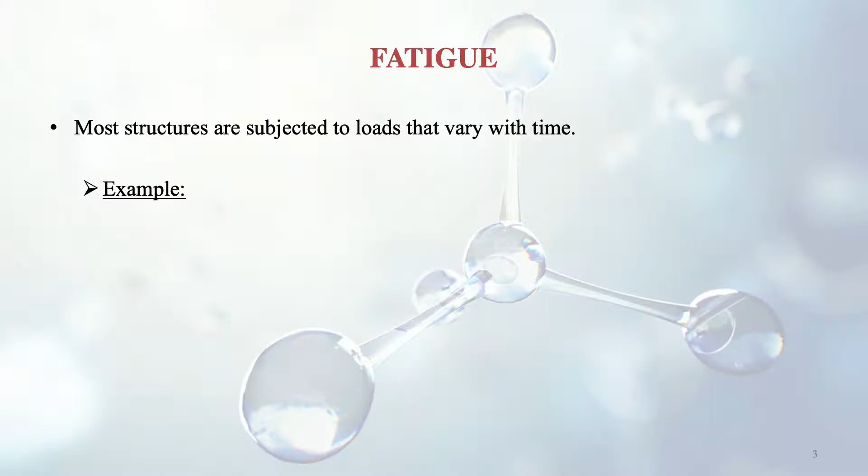Most structures are subjected to loads that vary with time, so it's a dynamic kind of thing. Dynamic means the time factor comes in. Examples include aerodynamic loads, wind loading on buildings, and the earth's resistance to earth-moving machines. All these are dynamic loads which keep changing with time.

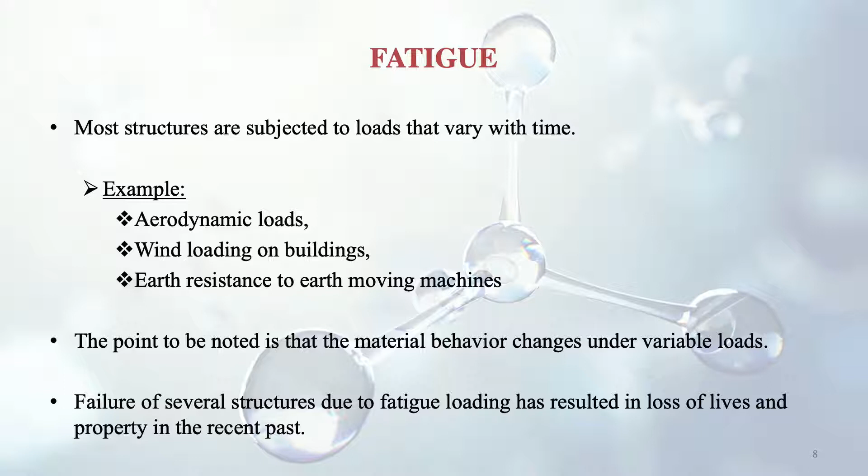The point to be noted is that material behavior changes under variable loads. Different properties of materials and their behavior change under loads varying with time. Failure of several structures due to fatigue loading has resulted in loss of lives and property in the recent past, such as bridge failures or space shuttle failures, where materials used may be failing over time without our knowledge.

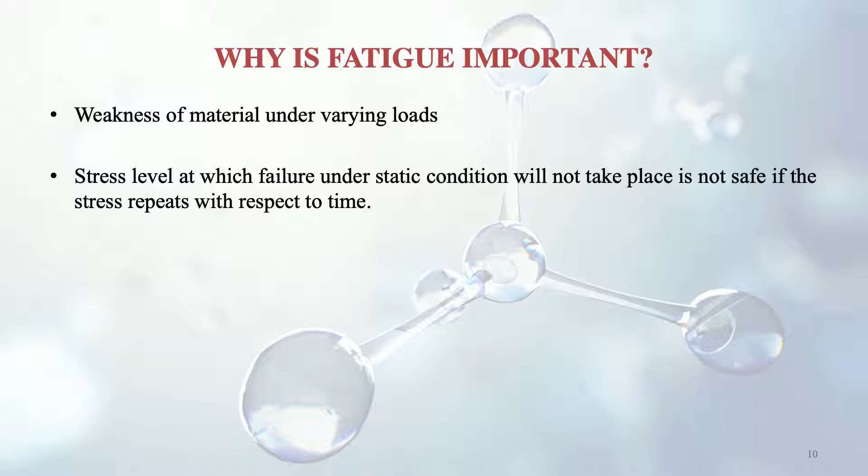Why is fatigue so important? Because the weakness of the material keeps increasing under varying loads. A stress level at which failure under static condition will not take place is not safe if the stress repeats with respect to time. So failure under static condition occurs at a higher stress level, but if the load is varying, it occurs at a lower stress level. Theoretically, there is no stress level for most materials which will be indefinitely safe - there is no level where we can say no failure will take place beyond or below it.

However, practically, some safe stress level can be defined and determined for a specified number of cycles. In practical terms, we define a certain stress level below which we say it will be safe even if you increase the number of cycles.

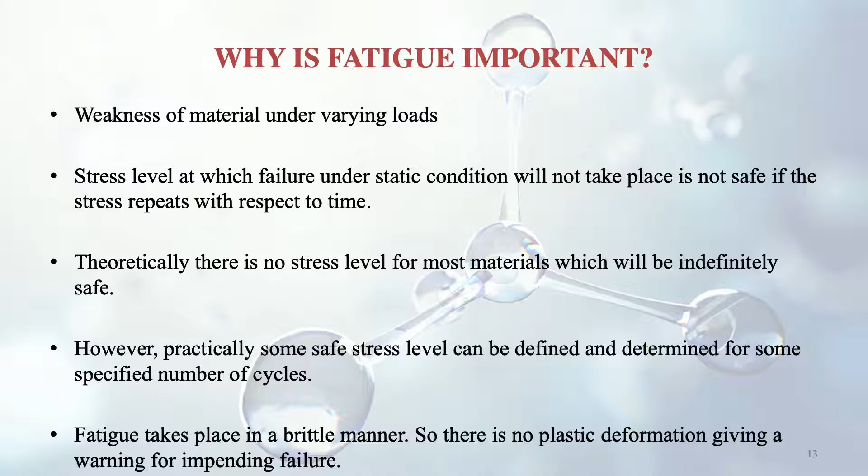Fatigue takes place in a brittle manner, so there is no plastic deformation giving a warning for impending failure. This is a very important thing to know - fatigue will take place in a brittle manner. So brittle fracture, we know, just happens - there is no warning. In case of ductile material, we have seen earlier that necking and other things take place, but in brittle fracture nothing like that happens. So it is instantaneous, we can say.

One example of this is an airline in the 1980s, the Aloha Airlines flight, where the upper portion of the fuselage broke apart. This was also a kind of fatigue failure.

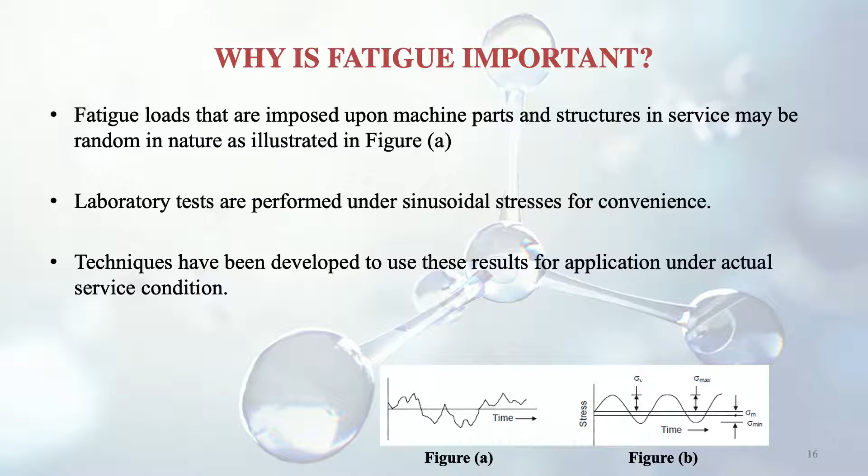Techniques have been developed to use these results for application under actual service conditions. The sinusoidal stress variation is shown in the figures as mentioned before. This stress cycle is also termed fluctuating - like a bulb, if the voltage in your house fluctuates, the bulb light also fluctuates. So this is what fluctuation means, and the stress also fluctuates like that.

About 90% of data are collected under fully reversed stress cycle, meaning suppose the stress is on the positive side at some point, then it will be towards the negative with equal magnitude as the cycle moves forward. This is what is meant by reversal of stress - one time it is completely positive and the other time completely negative with the same magnitude, in the opposite direction.

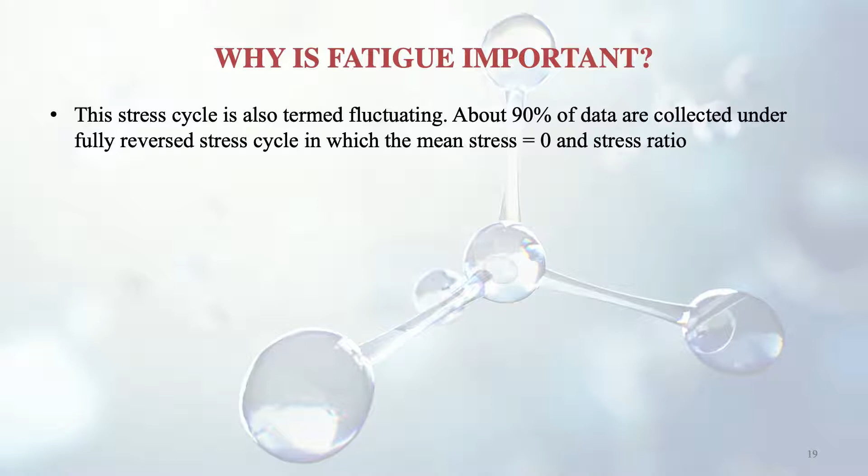So, fully reversed stress cycle in which the mean stress is 0, and the stress ratio is given by R, that is sigma minimum upon sigma maximum. Sigma minimum is the minimum stress and sigma maximum is the maximum stress, and the mean stress is sigma max plus sigma min divided by 2, and the variable stress component is given by sigma max minus sigma min divided by 2.

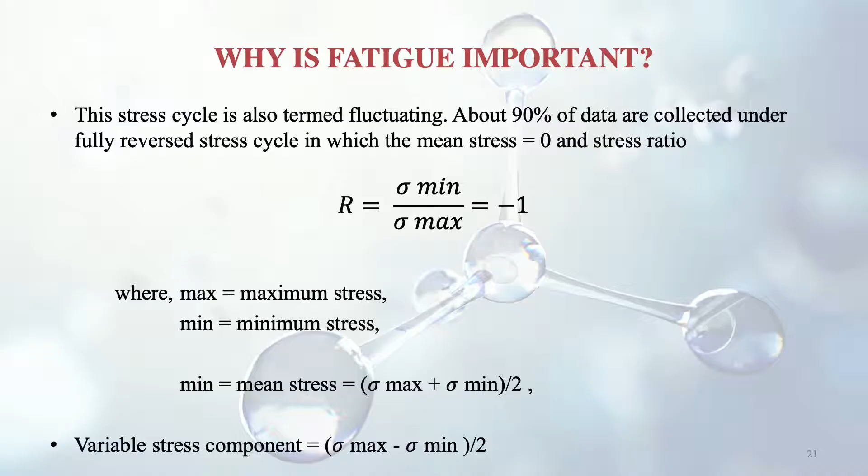Now we discuss the test procedure for fatigue. The applied stress can be of different types: axial, bending, torsion, or their combination, like all these loads we have discussed in our earlier sessions. So in each case a particular type of machine is required. When you have different types of loads, different types of machines are used.

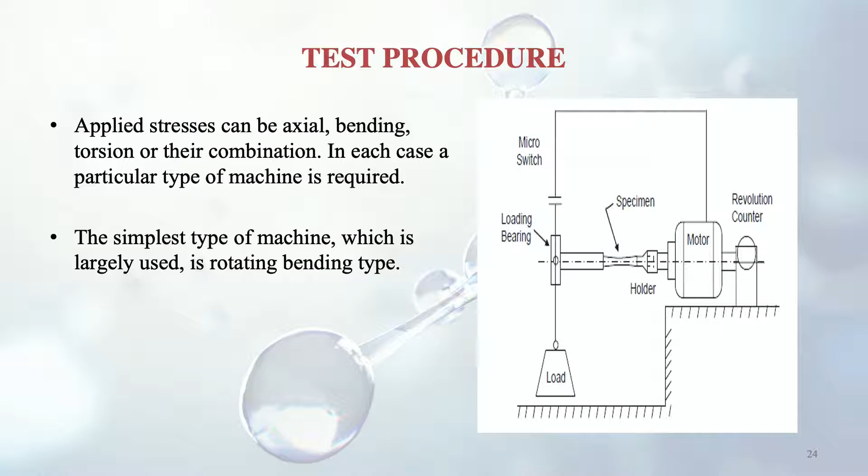The simplest type of machine which is largely used is the rotating bending type, shown in the figure. In this machine, a dead weight is applied upon the specimen through a bearing while the specimen rotates. Generally the specimen is loaded as a cantilever or under 4-point bending. As given in the figure, it's like a cantilever.

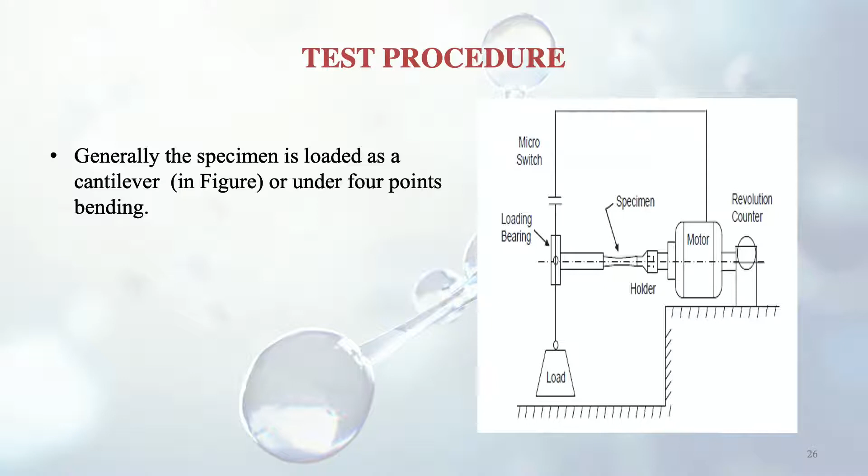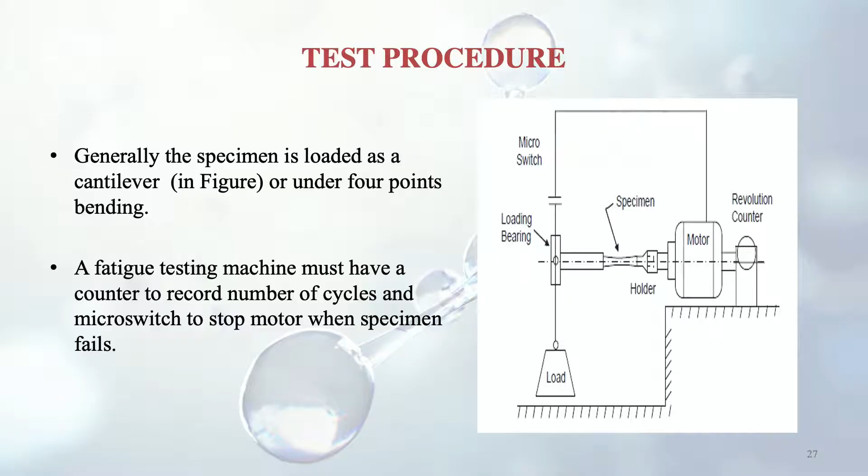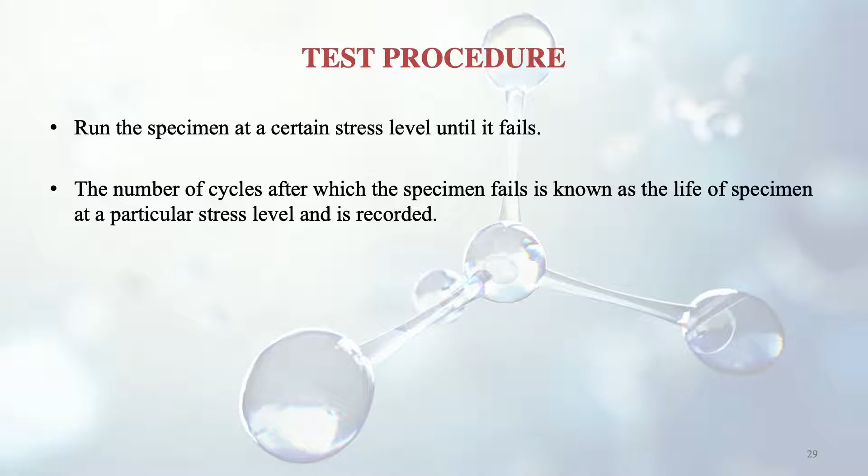A fatigue testing machine must have a counter to record the number of cycles and a micro switch to stop the motor when a specimen fails. So what we need to do is run the specimen at a certain stress level until it fails. The number of cycles after which the specimen fails is known as the life of the specimen at that particular stress level and is recorded. Thus, a number of observations for stress levels and corresponding number of cycles to failure are obtained.

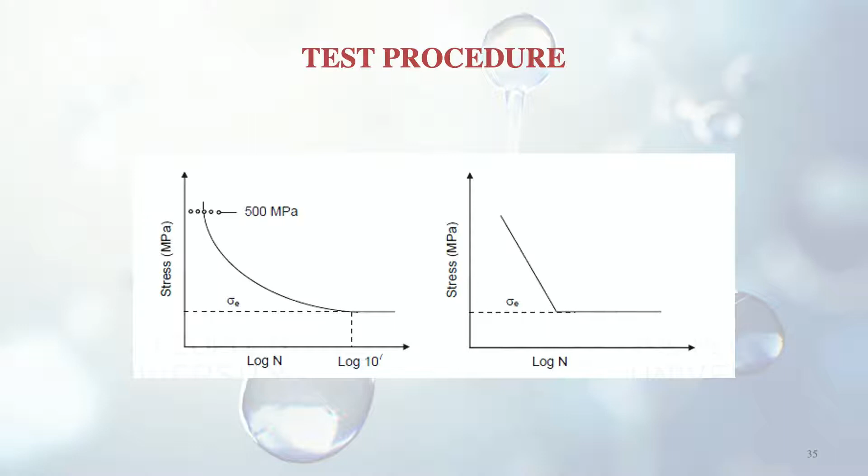Generally, several specimens at each stress level are tested. For obtaining fatigue curves, the stress levels are plotted as ordinates and logarithms of the number of cycles are plotted as abscissa. So this is a curve where stress is on the y-axis and logarithm of the number of cycles is on the x-axis.

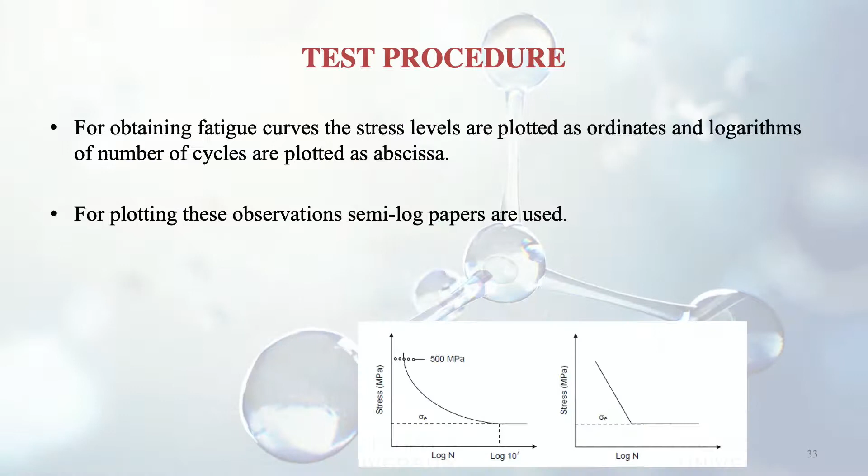Why are we taking logarithmic? Because it gives a certain number. Suppose it is 10 to the power 4 cycles; when we take log of that to the base 10, it gives us the number 4. So we can represent it on the scale in a convenient manner, like 1, 2, 3, 4, 5, 6, 7 and so on. For plotting these observations, semi-log papers are used because one axis is log based and the other one is simple.

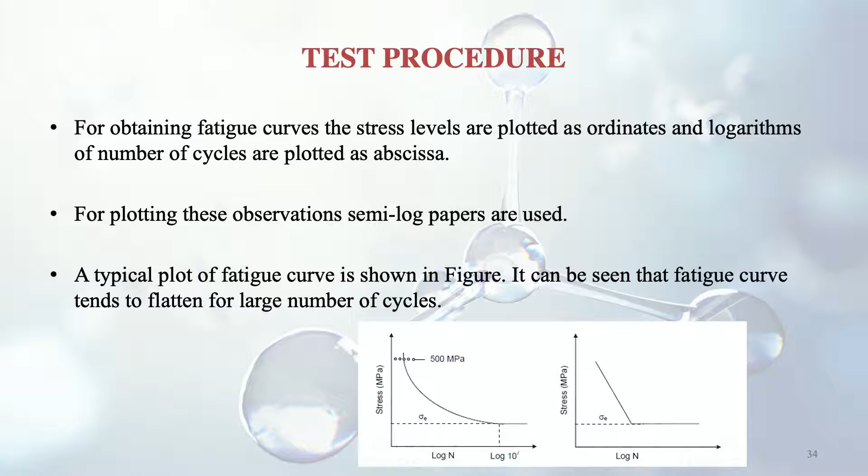A typical plot of the fatigue curve is shown in the figure. It can be seen that the fatigue curve tends to flatten for a large number of cycles, meaning that it becomes parallel to the x-axis after a large number of cycles.

The highest stress level is so chosen that the number of cycles to failure is around 10 to the power of 4. The fatigue curve is seldom investigated for cycles less than this, because if we are looking at fatigue, we need a number of cycles. We cannot say we've done it for 10 or 15 or 20 cycles; no, we need a larger number. So that minimum is around 10 to the power of 4.

Further, the fatigue tests are rarely continued beyond 10 to the power of 8 cycles, because such long endurances are not common in service and the time required for them will be very long. So if we want to go to 10 to the power of 8 cycles, it will take a very long time, and this fatigue testing will require a very long time and will not be practical for us. Also, the material becomes more endurant after a certain number of cycles, so we don't need to go to such a large number of cycles as 10 to the power of 8.

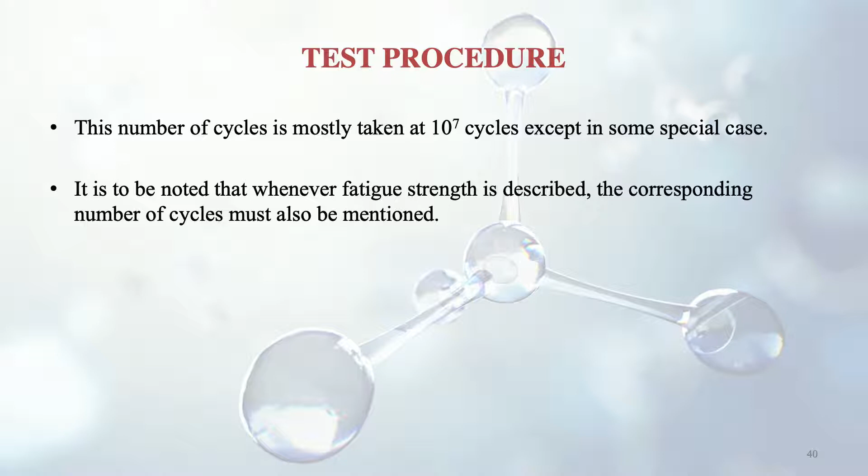The fatigue strength of material is defined as the maximum alternating stress which a material will withstand for a given number of cycles. So this is the fatigue strength of the material: the maximum alternating stress which a material can withstand for a given number of cycles. This number of cycles is mostly taken at 10 to the power 6 to 10 to the power 7 cycles, except in some special cases. It is to be noted that whenever fatigue strength is described, the corresponding number of cycles must also be mentioned, so fatigue without mentioning the number of cycles has no meaning because it's dependent on the dynamic type of loading.

There are some materials for which failure does not occur once the specimen has endured nearly 10 to the power of 6 cycles.

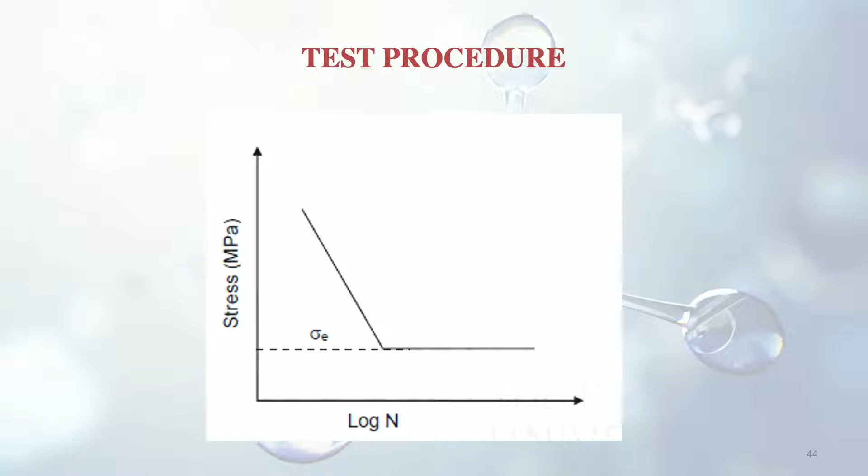It is a standard that if a specimen has already endured 10 to the power of 6 cycles without failure, we take it that this material is not going to fail. So this S-log-N curve comprises two straight lines: one in a finite region, an inclined line, and the other a horizontal line representing non-failure. This is for mild steel. It is always a straight line in case of mild steel, whereas it was curved for other materials. The stress at which the curve becomes horizontal is known as the fatigue limit or endurance limit.

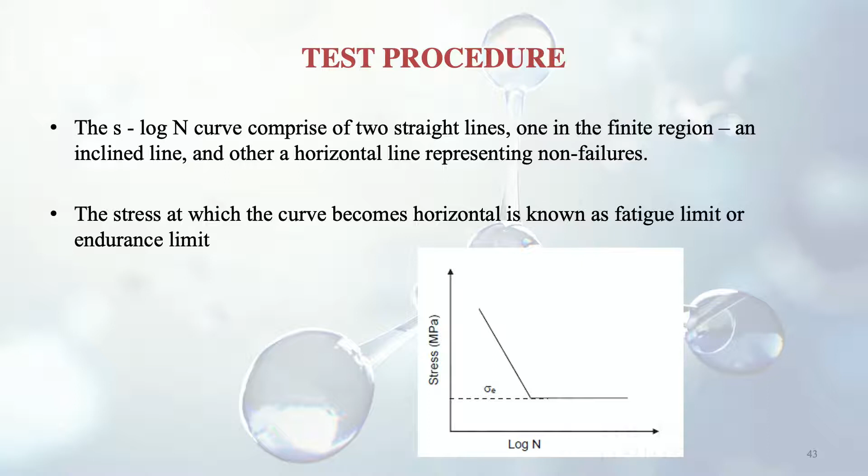Now we will discuss the mechanism of fatigue. How does this fatigue happen? Final failure in fatigue is due to extension of a crack to a critical value at which the uncracked portion is so small that the specimen cannot sustain the stress and hence fractures.

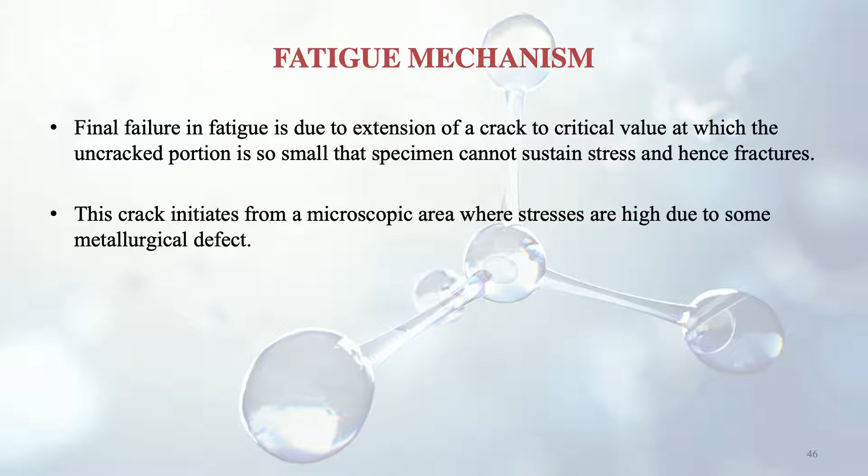Suppose I have a small hole of say 1 millimeter diameter, and due to fatigue it becomes larger - 2 millimeter, 6 millimeter, 8 millimeter - and it grows again and again. Finally it will reach a point where the uncracked material is very small, so it will rupture. This is the mechanism in fatigue: a small crack goes on increasing in dimension and becomes bigger as dynamic load is applied on it. This crack initiates from a microscopic area where stresses are high due to some metallurgical defect. Stresses can be high in that region even if the crack is small, due to the metallurgical defect.

There are various kinds of metallurgical defects, which is why manufacturing defects and metallurgical defects are important. Due to high stress at any point in a crystalline material, localized yielding takes place, resulting in slip in the direction of maximum shearing stress. Shearing stress also causes this crack to grow. As the stress cycling continues, the slip causes very minute cracks to generate, and they keep growing slowly and progressively with increasing number of cycles, as I explained earlier.

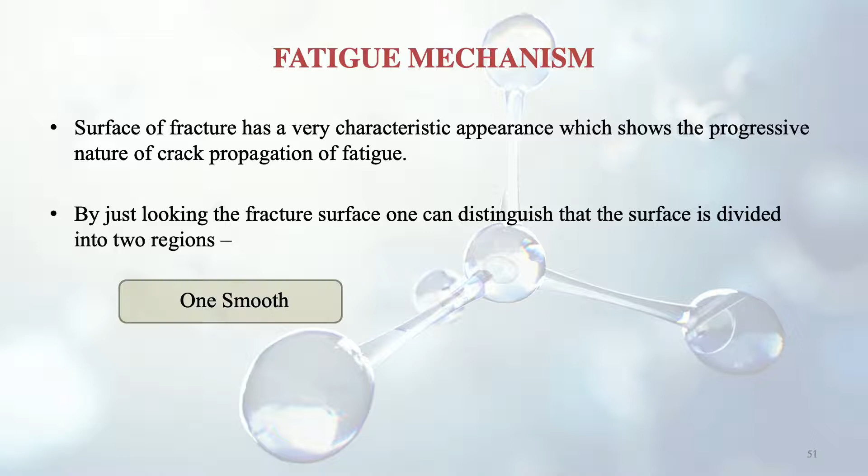The surface of fracture has a very characteristic appearance showing the progressive nature of crack propagation in fatigue. It's mostly on the surface that fatigue starts. By just looking at the fracture surface, one can distinguish that it is divided into two regions: one smooth and the other rough and jagged. If you take a specimen that was under fatigue, you can make out from the surface that one region is very smooth, the other is rough and jagged.

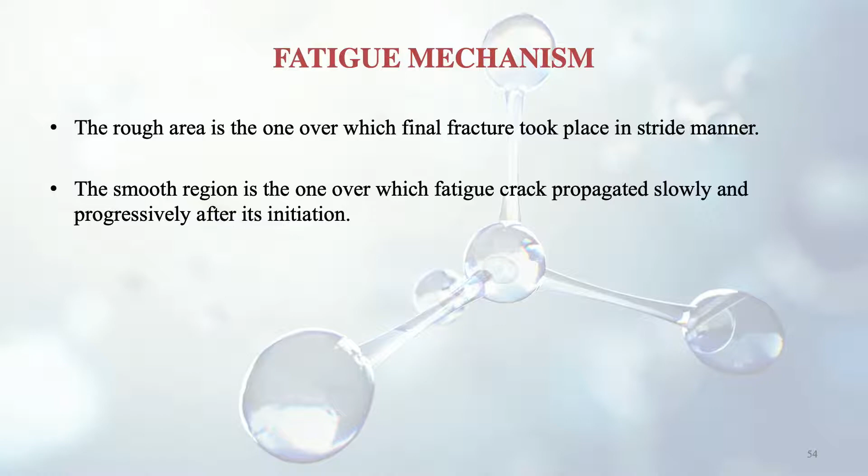The rough area is where final fracture took place in a sudden manner. The smooth region is where the fatigue crack propagated slowly and progressively after its initiation. The rough area is where fracture takes place, and the smooth one is where it propagates slowly. The two crack faces remain in contact, constantly rubbing against each other, which causes a smooth surface to come up.

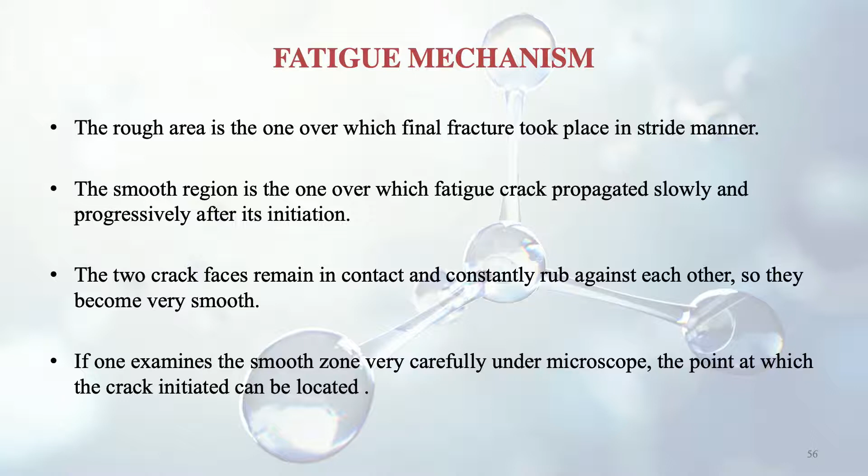If one examines the smooth zone carefully under a microscope, the point at which the crack initiated can be located. From the smooth zone, under a microscope, we can find the point from which the crack initiated. Marks like beach markings, in the form of conchoidal rings, spread out from that point - somewhat like concentric circles. These beach markings represent the sites where the crack stopped momentarily.

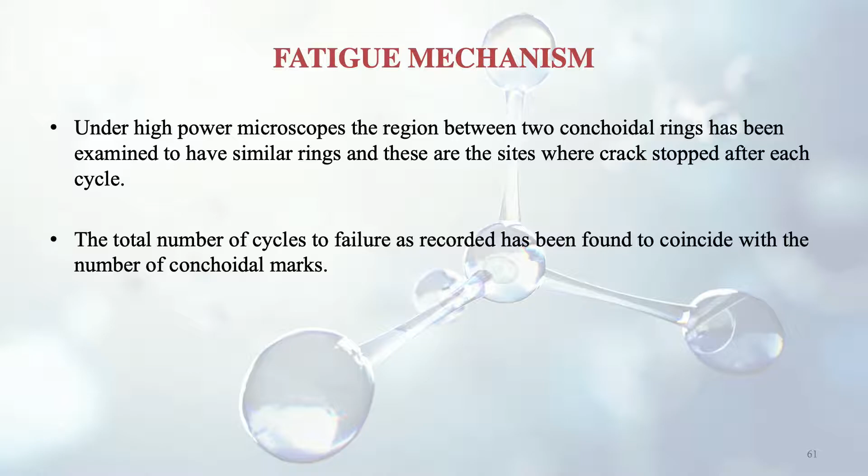In many cases, this nature of fatigue fracture surface can be seen by visual examination. Under high power microscopes, the region between two conchoidal rings has been examined to have similar rings, and these are the sites where the crack stopped after each cycle. We study this with high power microscopes because only then can we differentiate between two conchoidal rings. The total number of cycles to failure recorded has been found to coincide with the number of conchoidal marks, so these marks give us the total number of cycles.

The study of these conchoidal marks is very important. That's why you use the high power microscope to know about the number of cycles, because they are exactly similar to the number of cycles of loading.

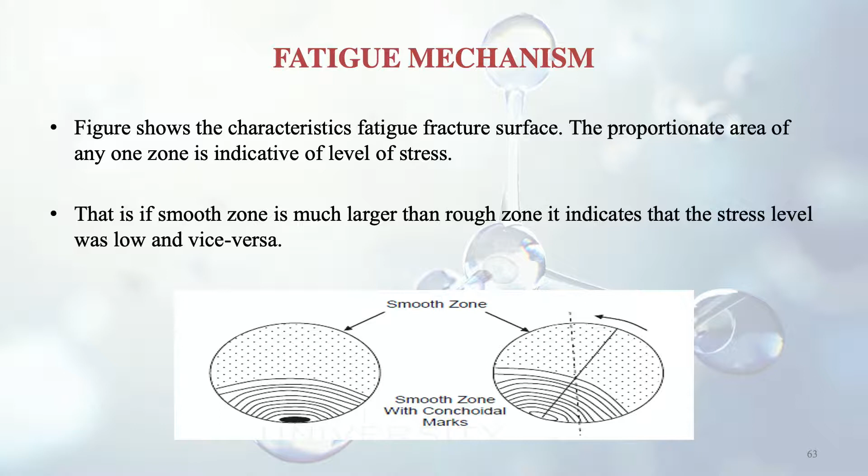If there are several points of crack initiation, it indicates that some geometrical stress concentration on the surface was present. So if there are several points of cracks, or a number of small cracks, it means that the specimen was subjected at that place to a very high stress concentration.

In rotating bending, the conchoidal rings tend to turn and center on a different diameter. So if it is on a certain axis, it turns and takes up a different diameter. It is shown in the figure, the tendency of the crack to propagate in a direction opposite to that of the rotation.

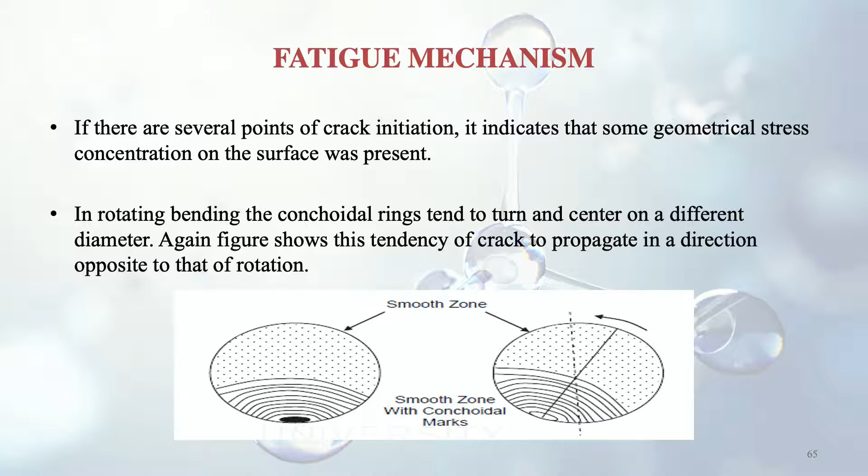Now we discuss the statistical nature of fatigue. The basic nature of the fatigue mechanism suggests that one can expect a large variation in data. The initiation of a crack at a point in the material depends upon a suitable combination of highest stress concentration due to local defect and level of stress, along with a larger number of cycles.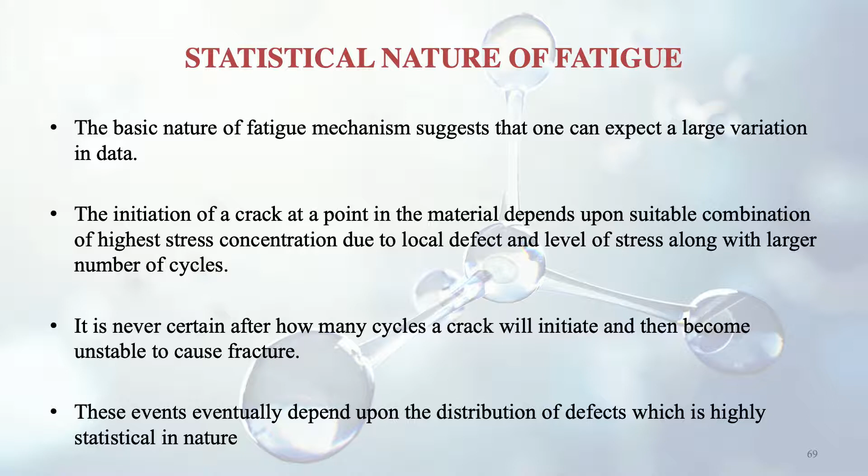It is never certain after how many cycles a crack will initiate and then become unstable to cause fracture. So we never know how many cycles we need for a crack to go up to the rupture point—it's a guess type of work, iterative type of work. These events eventually depend upon the distribution of defects, which is highly statistical in nature. That's why we are discussing the statistical nature of fatigue.

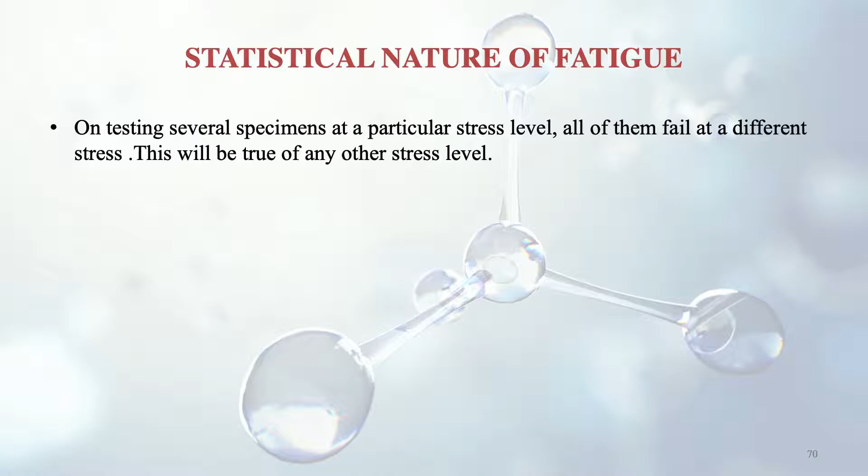On testing several specimens at a particular stress level, all of them fail at a different stress. So suppose there is a specimen and you test it at a particular stress level—all of them may fail at a different stress. We have defined a certain stress level, but some plus or minus is there in every case, and this will be true of any other stress level as well. This creates difficulty in analyzing fatigue.

For example, in plotting the stress versus log n curve—how will we plot the curve? Because we don't know at what stress level we can say is the endurance limit.

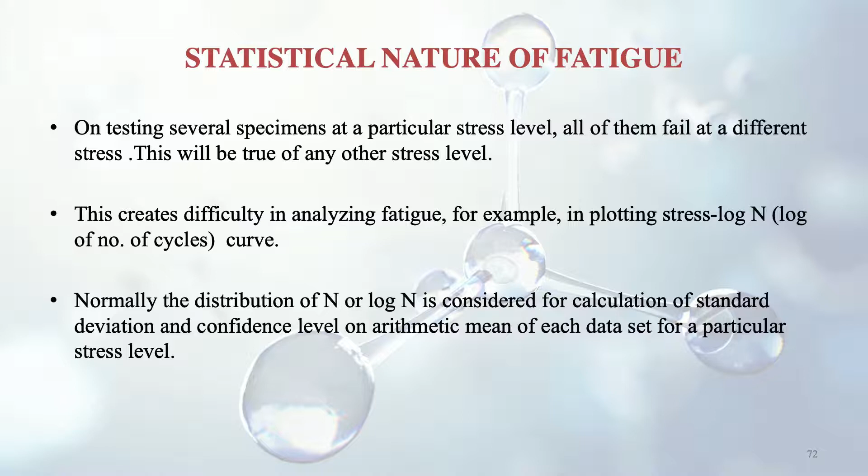Normally the distribution of n or log n is considered for calculation of standard deviation and confidence level on the arithmetic mean of each data set for a particular stress level. So we generally take the plus or minus around a particular stress level, and take the mean of that to determine at what stress level it is going to fail, or what will be the endurance limit.

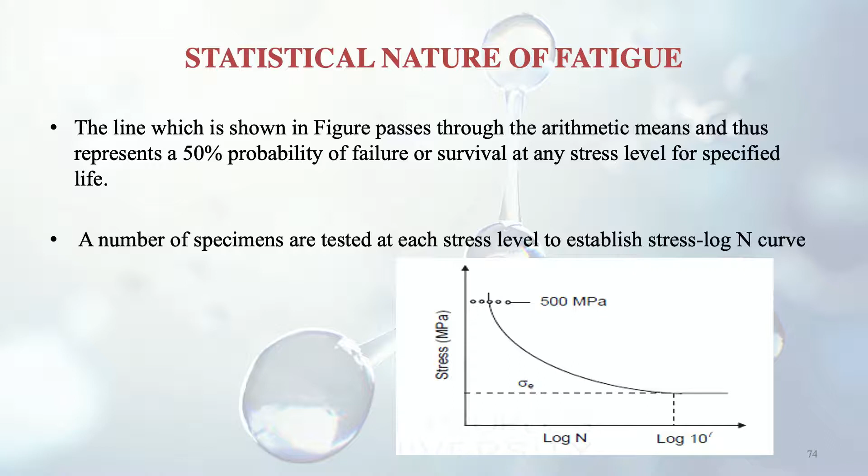So in the figure you can see the line that passes through the arithmetic means, thus representing a 50% probability of failure or survival at any stress level for a specified life. A number of specimens are tested at each stress level to establish the stress versus log n curve.

Determination of the fatigue strength or limit of a material becomes still more complicated if one recognizes the fatigue limit or strength as a stress level above which the material will fail and below which it will not fail. So it is quite difficult to determine this fatigue strength limit of the material.

Several methods have been introduced for calculation of fatigue strength based upon statistical methods. Thus we have different statistical methods, which I am not discussing here—you can read from your material, and for any further queries you can address them to me.

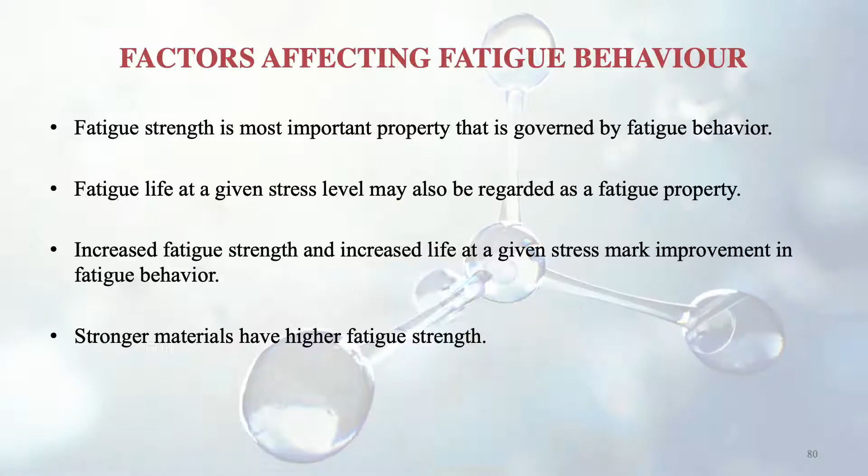Now we discuss the factors affecting fatigue behavior. Fatigue strength is the most important property governed by fatigue behavior. Fatigue life at a given stress level may also be regarded as a fatigue property. Increased fatigue strength and increased life at a given stress mark improvement in fatigue behavior—obviously, because it can then take up more varying types of loads, and its endurance limit will increase. The stronger materials have higher fatigue strength.

Half of ultimate strength in tension is equal to the fatigue strength obtained from a smooth polished specimen in a rotating bending machine for steel. So generally, half of the ultimate strength in tension equals the fatigue strength for the stronger materials.

If the stress cycle is pulsating, the fatigue strength is 40% higher, and if reversible axial stress is applied, the fatigue strength is 15% lower. So reversible axial stress is much more dangerous in one sense than the pulsating type of stress, because the fatigue strength is very much lowered in case of reversible axial stress.

Increasing size above 12 millimeter diameter reduces the fatigue strength, while for very large sizes around 200 millimeter diameter, the size effect ceases. Suppose the diameter goes above 200 millimeter, then size will not have any effect on fatigue strength as such. For low diameter cracks, it will have an effect.

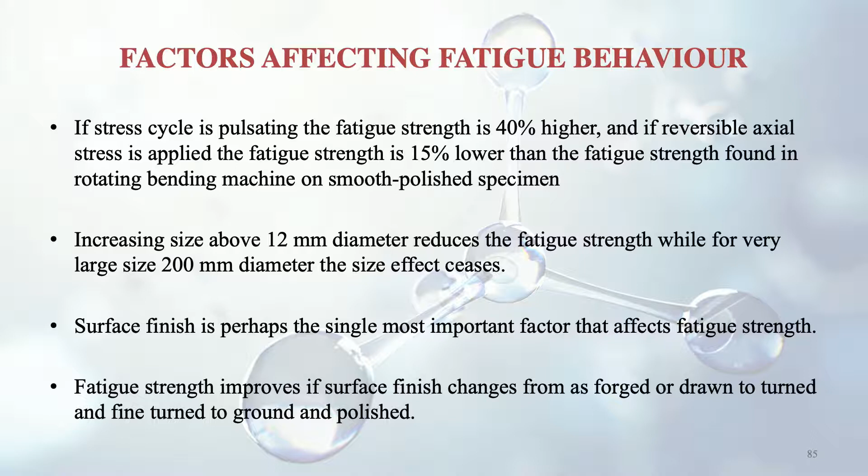Surface finish is perhaps the single most important factor that affects fatigue strength. Fatigue strength improves if surface finish changes from as-forged or drawn to turned, and from fine-turned to ground and polished. So this is the variation.

Fatigue strength increases as we improve the surface finish. The forged one is the most crude, then we go to the turned one, and finally the fine-turned or ground and polished one. So this gradual scale moves towards more finished specimens, except in a few cases where the inside of the material has a defect.

The fatigue crack initiates from the surface, so it is mostly a surface phenomenon. Only in exceptions may the crack start from inside the material.

Surface crack initiation in fatigue occurs because the surface is inherently weaker, is exposed to corrosion and oxidation, is where cutting and forming forces act, and stress is inherently highest at the surface, whether axial, bending, torsional, or a combination.

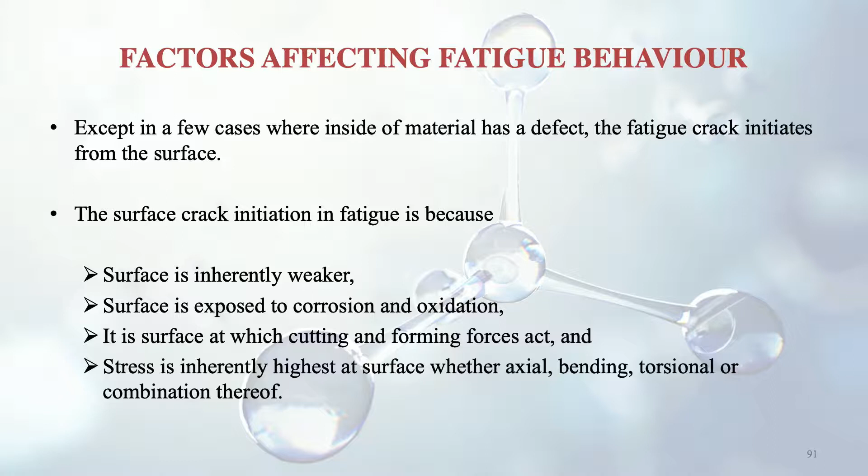So we see that it depends on the surface how the fatigue failure takes place or how the crack propagates. Practical applications place some stress concentration on the surface, and corrosion and high temperature damage the surface.

Good surface finish and surface mechanical and heat treatments like shot peening, surface rolling, carburizing, nitriding, and cyaniding help obtain improved fatigue properties. We will study these further when we discuss ferrous alloys in upcoming lectures.

Vanadium is the only alloying element that improves the fatigue strength of steel. Only vanadium we can alloy for this purpose, nothing else.

So now we discuss material problems at elevated temperatures. Most materials lose their strength at higher temperatures, the reason being greater mobility of atoms at high temperatures.

As discussed earlier, if the molecules inside the material are close enough or compact, it has greater strength or hardness. Similarly, if temperature is applied, they start moving away from each other, so the strength goes down.

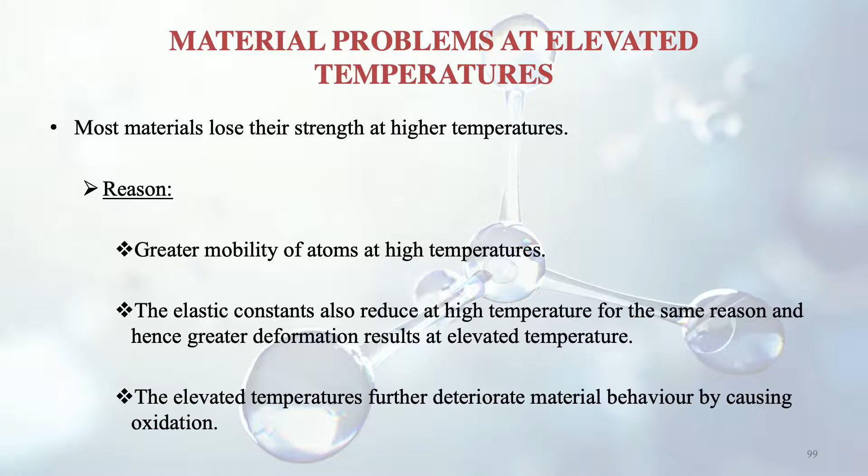The elastic constants also reduce at high temperatures for the same reason, hence greater deformation results at elevated temperature. Elevated temperatures further deteriorate material behavior by causing oxidation, a phenomenon where a certain layer forms that can harm the surface of the material.

This creates a demand for high temperature resistant materials. We are studying this temperature effect because nowadays there is huge demand for high temperature resistant materials used in different places, like high technology applications in nuclear engineering, steam and gas turbines, high pressure boilers, oil technology, transportation engineering, and many other fields.

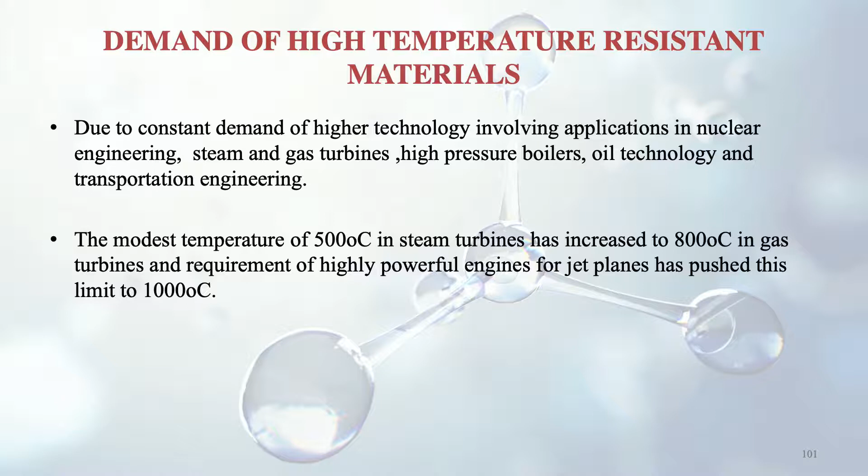The modest temperature of 500 degrees centigrade in steam turbines has increased to 800 degrees centigrade in gas turbines. So we require materials accordingly, otherwise they will not work at 800 degrees centigrade. The requirement of highly powerful engines for jet planes has pushed this limit to 1000 degrees centigrade.

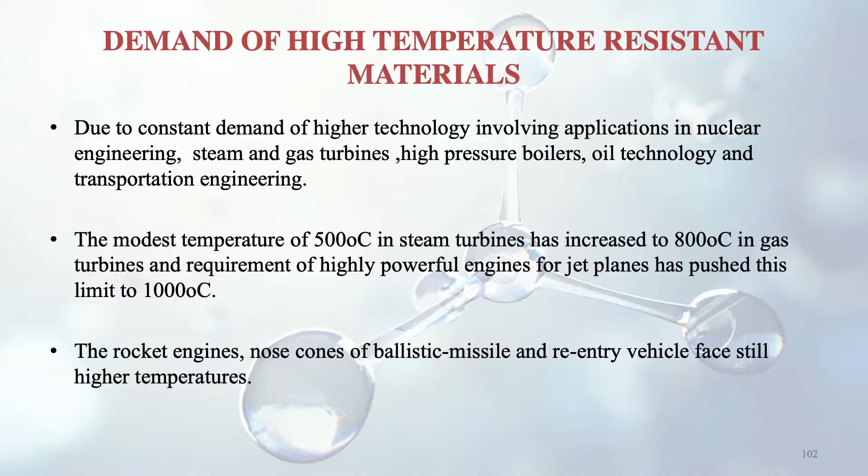High temperature resistant materials are very much required. The rocket engines, nose cones of ballistic missiles and re-entry vehicles face still high temperatures. We know that space shuttles, when coming back into the atmosphere, experience very high temperatures. They can fail if the material is not of the category which can withstand those high temperatures.

While static properties of materials are not much affected by the time required for testing at room temperature, the strain rate affects high temperature properties greatly. We have studied strain rate in previous sessions, and it does affect the high temperature properties.

It is characteristic of high temperature properties that the time element becomes important, particularly because a static load much below the yield load of material could result in gradual deformation at elevated temperature. So even before reaching the yield point in the stress strain diagram, plastic deformation can start taking place because of the high temperature. So it's very important to study this high temperature effect.

To study these high temperature effects, there is a property we need to know, called creep. Theoretically, at any temperature, a material will progressively deform under a constant load even if the stress is below yield. However, such deformation is negligibly small. The progressive deformation of a material at high temperature under constant stress is termed as creep.

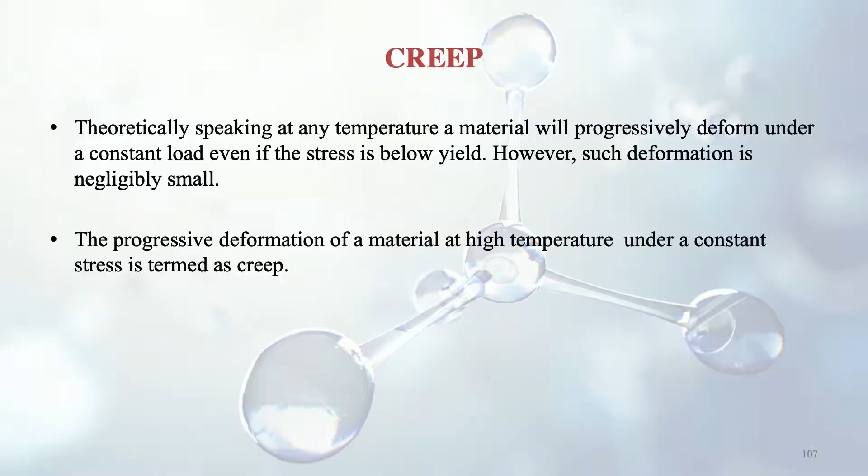So this is the definition of creep: there will be a progressive deformation of the material at high temperature under a constant stress, which may be lower than the yield point stress. Creep can become quite appreciable depending upon the combination of temperature and stress, so creep depends on both temperature and stress.

The deformation of material in the laboratory is mostly measured as the strain suffered by a tension specimen, so laboratory tests are done in terms of strain only. The temperature at which creep becomes appreciable is half of the melting point temperature on the absolute scale, known as the homologous temperature.

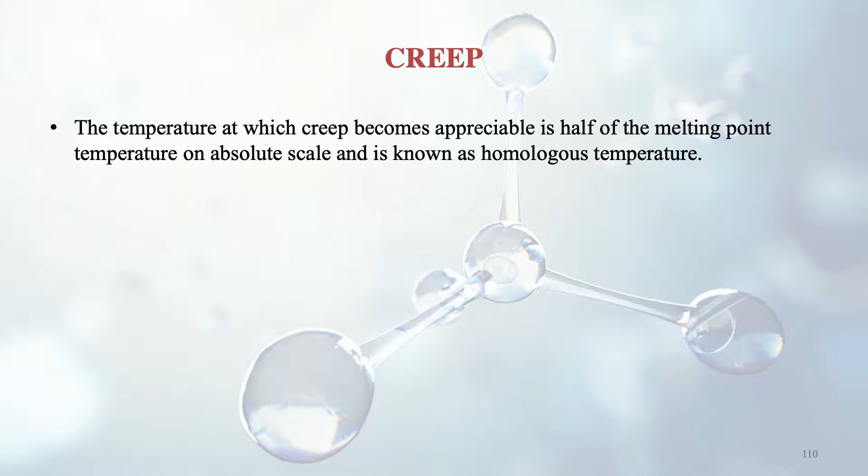Creep experiments can be performed in simple machines that use dead weights and levers for loading the tension specimen. The specimen is placed inside a furnace at a certain temperature, similar to setups used in simple tension tests. The additional thing is that we have a furnace to raise the temperature to different levels.

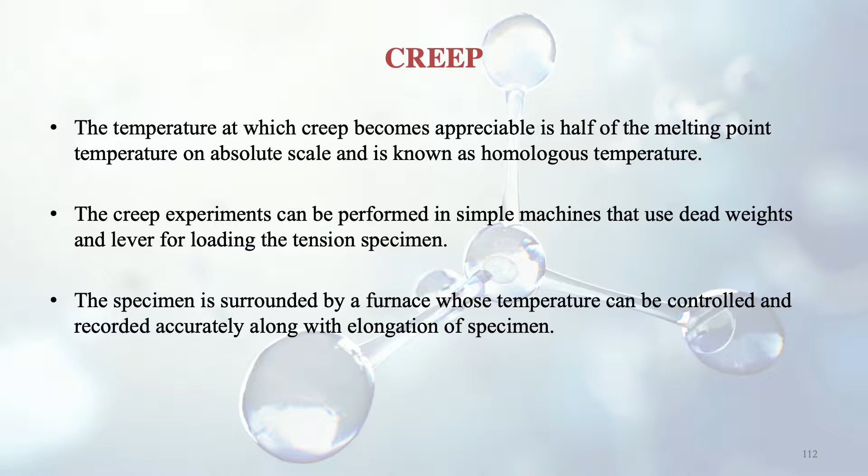Now we discuss a very important curve known as the creep curve. The creep curves are plotted between strain and time, since generally in the laboratory strain is measured. So this is a curve between strain and time for a given stress and temperature, where the stress and temperature are constant, and the variables are strain and time.

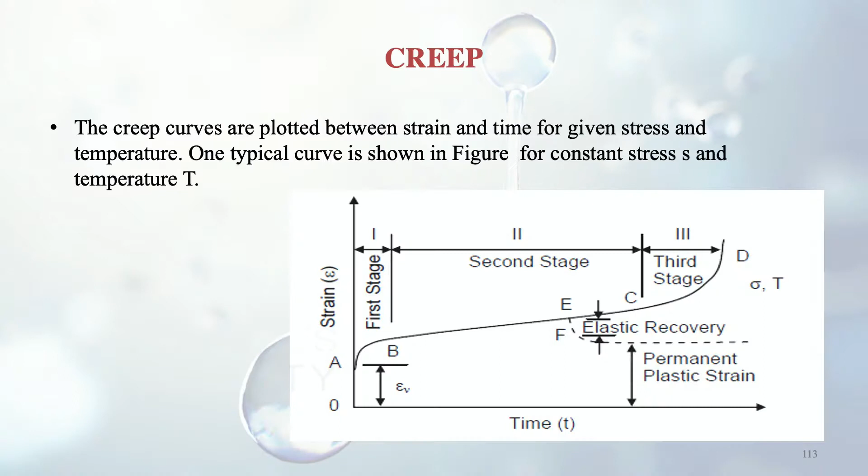One typical curve is shown for constant stress S and temperature T. The specimen is loaded at point O, the origin, corresponding to zero strain and zero time. Immediately after application of stress, the specimen suffers elastic strain up to point A. So OA is elastic strain, and whenever the load is removed, it comes back to the origin, meaning the strain can be fully recovered.

As time passes, the specimen continues to extend with decreasing rate up to point B. The rate of extension has gone down and continues until point B, and further on it becomes constant, remaining so from B to C, meaning the rate of extension is constant, so the line has a constant slope as shown in the figure.

From point C onwards, the rate of increase of creep strain increases up to point D, where fracture or rupture takes place. This curve is divided into three portions, which I am now discussing with you. The creep curves are plotted between strain and time for a given stress and temperature, and there are three phases here.

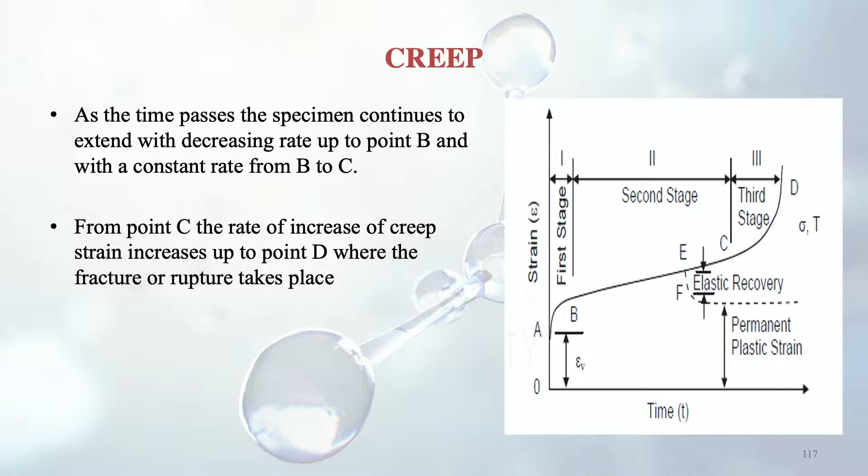Although the description of the creep curve appears quite simple, the collection of data involves a complicated control, measurement and recording system.

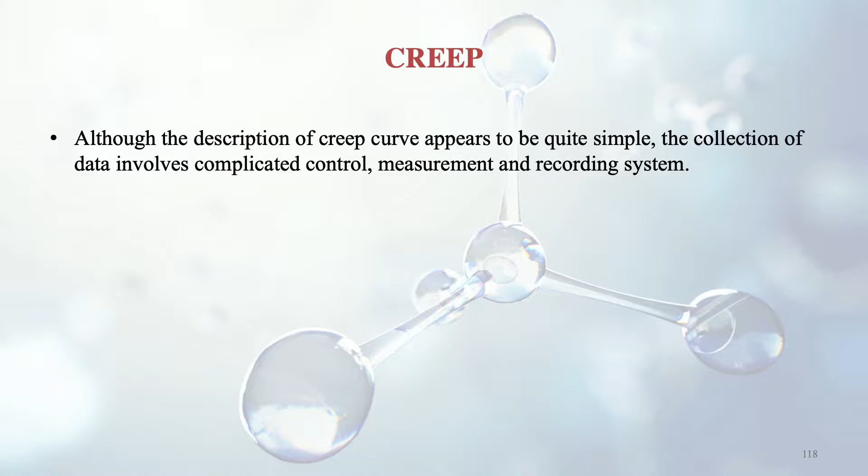When we see that, it seems very simple that with time and temperature this elongation is taking place, but this time is actually very long, and it becomes very complicated to do such experiments. The important point is that the total time required in the creep curve may be very large.

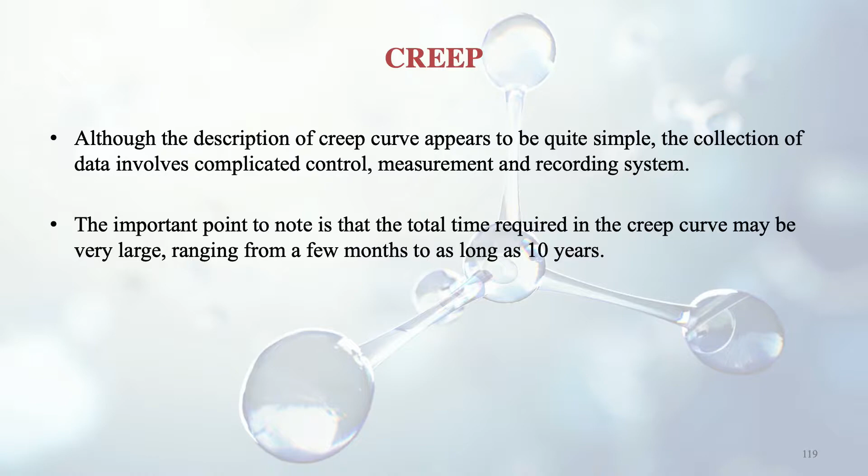Ranging from a few months to as long as 10 years. So we will have to wait up to 10 years, and the instruments are supposed to be working throughout this time. Generally, a battery of machines is required to make simultaneous studies at different temperatures and stress levels.

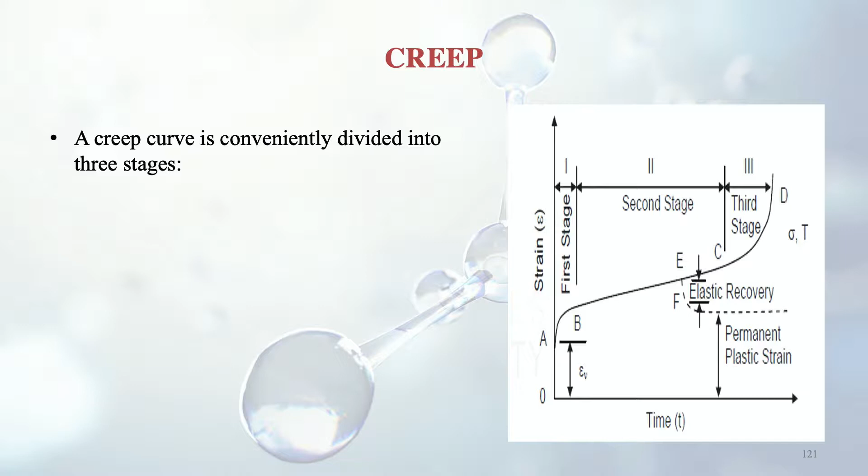So here we see in this curve again that the creep curve is conveniently divided into three stages. Stage 1, which we discussed earlier, is of primary creep, and it extends from point A to B.

So from point A to B, there is a slight decrease in the rate of this extension, and this covers a small part of the total period.

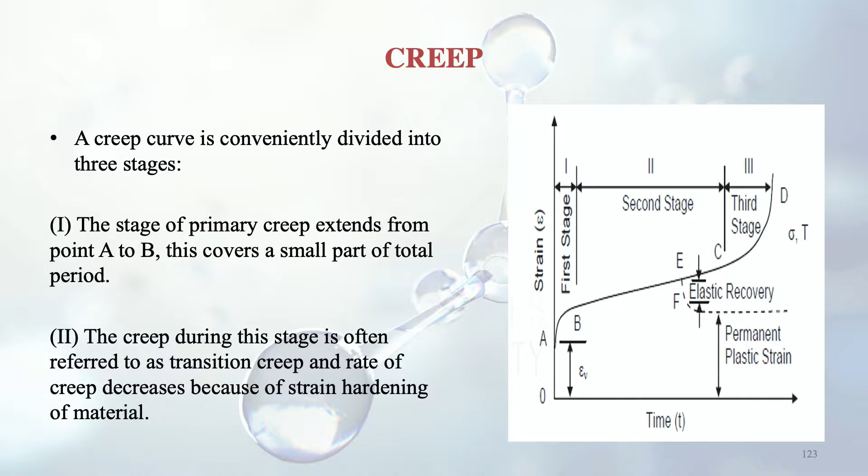The creep during this stage is often referred to as transition creep, and rate of creep decreases because of strain hardening of the material. So in this zone from A to B, strain hardening is taking place, that's why the creep elongation or deformation is decreasing.

From B to C, it can be seen that rate of creep is constant. As I told earlier, the slope is constant, so it is linear. This is known as stage 2 or creep, identified by its constant rate.

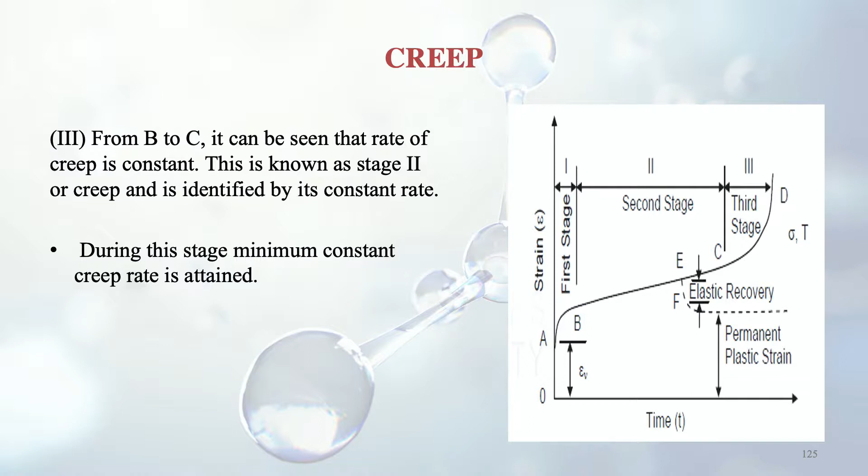During this stage, minimum constant creep rate is attained. This steady state creep is the result of a balance between two effects.

Why is it happening like this? There are two effects: one is strain hardening, and the other is softening due to temperature. Earlier, from A to B, only strain hardening was taking place, whereas here, strain hardening is taking place but it is being compensated by the softening due to temperature.

In service conditions, most machine parts which are required to have infinite life work in the secondary creep zone.

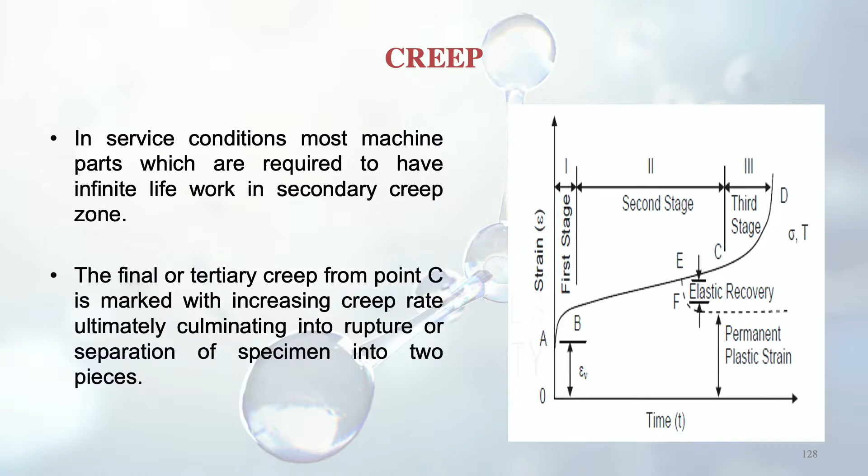The final or tertiary creep from point C is marked with increasing creep rate, ultimately culminating into rupture or separation of a specimen into two pieces. So finally we reach the rupture point.

It may be pointed out that during tertiary creep, necking also takes place, like we had seen in the simple tension test. So here also necking takes place, which increases effective stress, and thus rate of strain also increases.

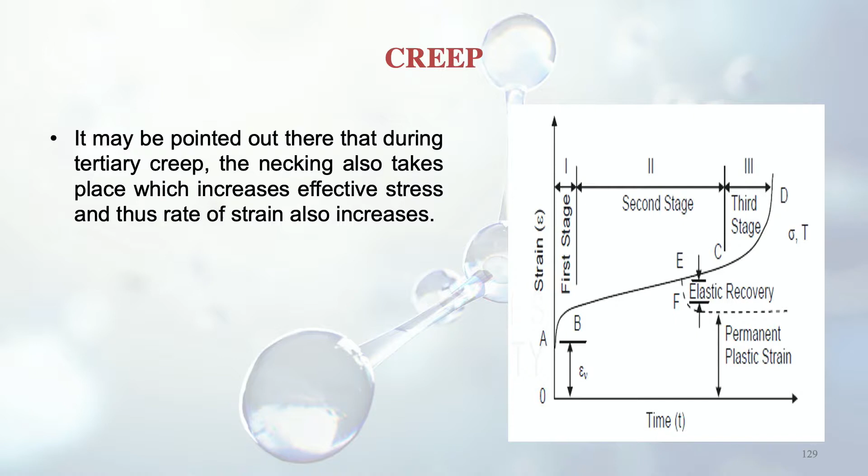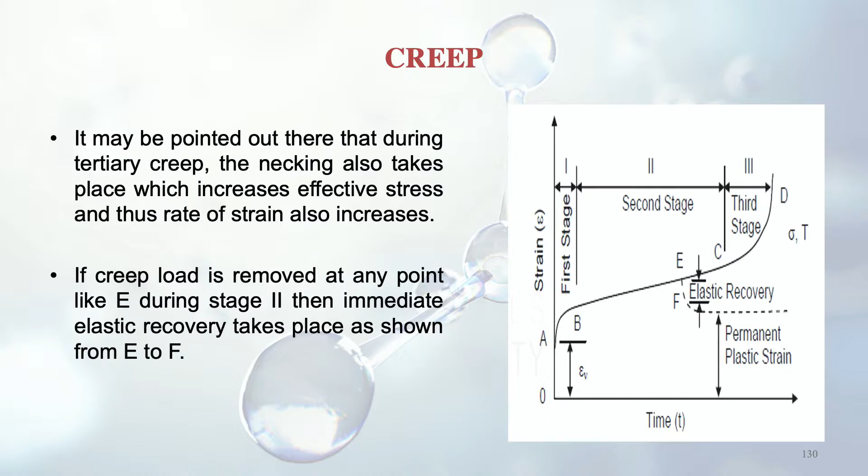If creep load is removed at any point like E during stage 2, then immediate elastic recovery takes place, as shown in the figure from E to F. So elastic recovery again takes place if the load is removed at point E, but it is not a complete recovery.

Like it was from the region O to A, this shall be followed by a gradual strain recovery, leaving a permanent strain which does not recover at all.

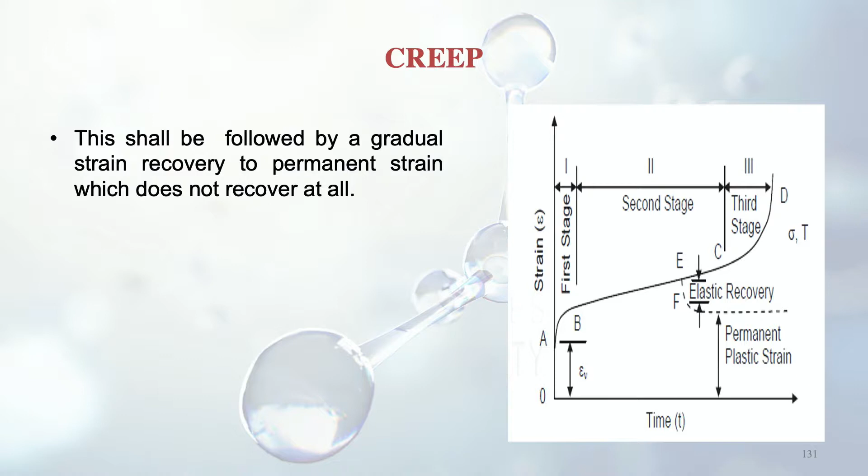So now we discuss the effect of temperature on creep. Temperature effect is there on creep as well. The basic nature of the creep curve remains the same at various stress levels for several temperatures and vice versa, so the type of creep curve will remain the same whether stress or temperature is different.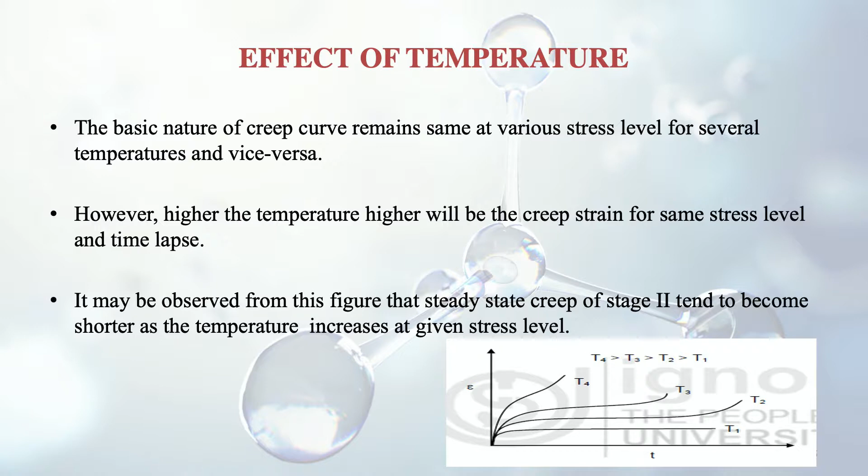So from the figure it is quite obvious that the second stage is decreasing as we go up to higher temperatures for the same stress level.

Similar is the case when we have different stress levels. Earlier we had different temperatures; now we have different stress at the same temperature, suppose. So for a given temperature and the same lapse of time, creep strain will be higher again at higher stress level.

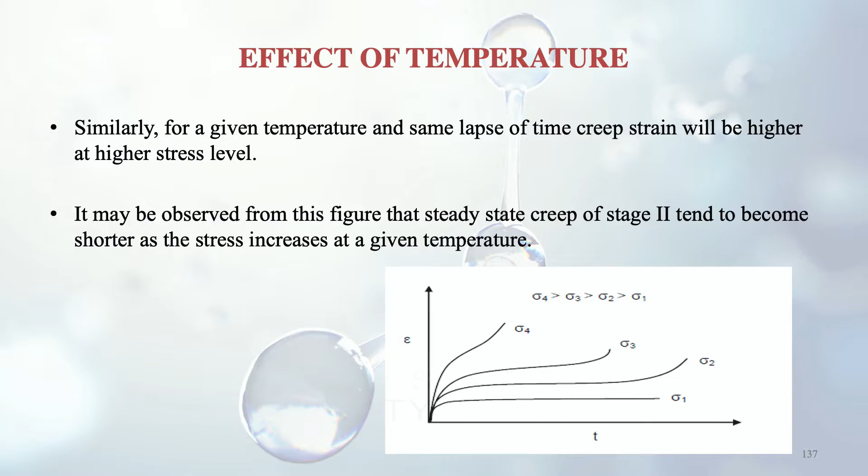It may be observed from the figure that the steady state creep of stage 2 tends to become shorter as the stress increases at a given temperature.

So the same case again here is that if the stress is going higher at a given temperature, then stage 2, which we have seen earlier among the three stages of the creep phenomena, will become shorter.

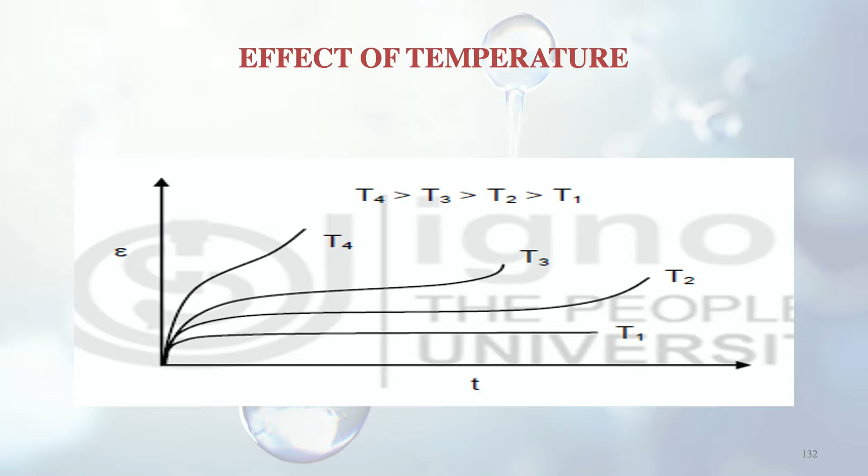You can see this from the strain versus time curve here, whereas the temperature is going on increasing, it is also going on getting shorter. This second phase of the creep curve becomes shorter.

After studying the temperature effects, let's see one more thing: stress rupture. In a creep curve, emphasis is on strain measurement, strain versus time. The stress is chosen such that the strain rate is minimum. The total strain in such tests seldom exceeds 0.5%, and time required for completion is in the range of 2000 to 10,000 hours. So the time range is quite large, but the strain is quite less.

Our goal is to tolerate the creep deformation and prevent rupture, meaning the material should not go up to the rupture point. But a long time is consumed in performing such creep tests, which may impede technological development. So to cut short this time, stress rupture tests, in which specimens fail by rupture, have been developed.

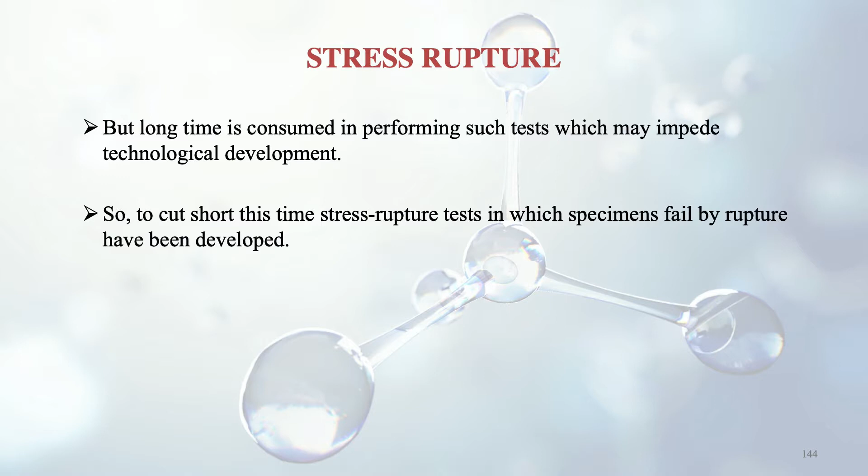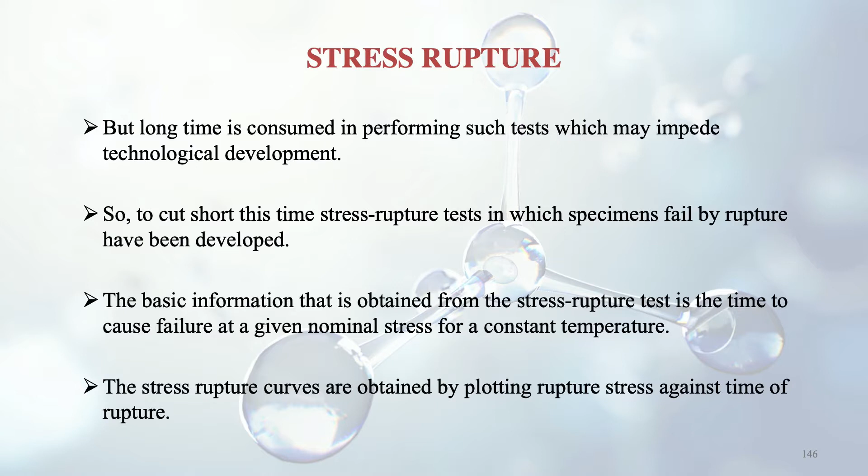The basic information obtained from the stress rupture test is the time to cause failure at a given nominal stress for a constant temperature. So we keep the temperature constant and see at what nominal stress the material fails. The stress rupture curves are obtained by plotting rupture stress against time of rupture.

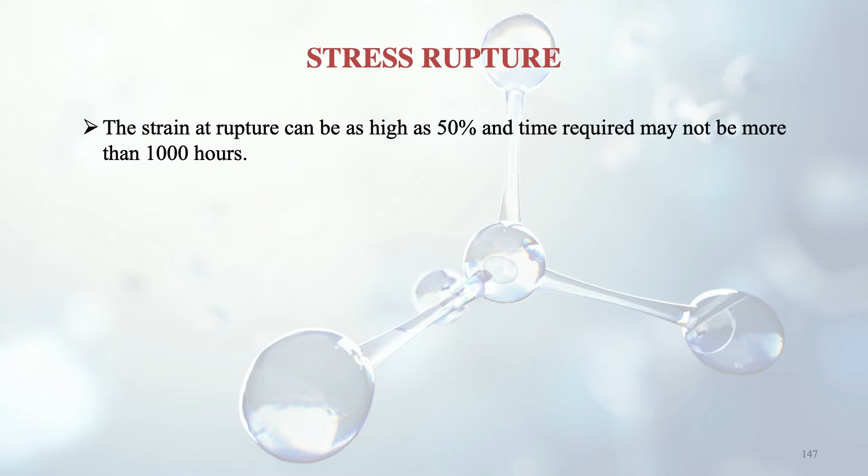The strain at rupture can be as high as 50%, and the time required may not be more than 1000 hours. So we see here that the time has lessened, so we can perform this test much more easily compared to the creep test, which was taking around 10,000 hours earlier.

Now we further discuss creep and rupture strength. Creep limit as such cannot be defined, unlike the endurance limit in fatigue; creep limit is very difficult to define. There is no limiting stress at which creep does not take place, so we cannot say below this level of stress creep will not occur. It is not that kind of phenomenon.

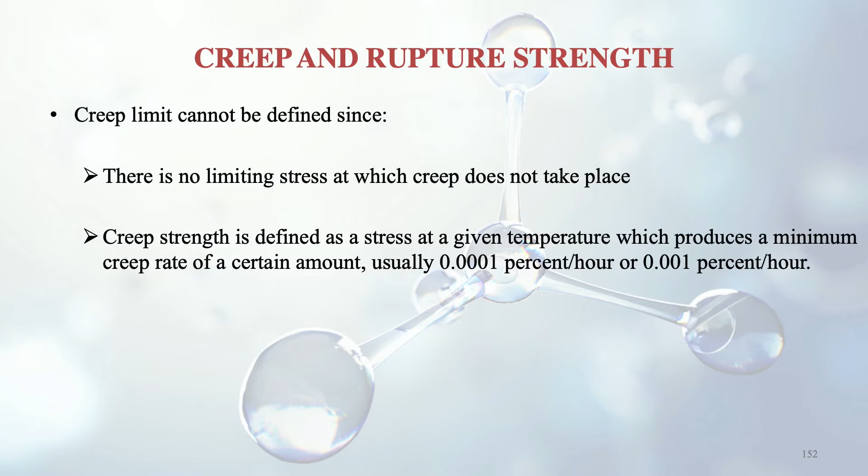Creep strength is defined as the stress at a given temperature which produces a minimum creep rate of a certain amount, usually 0.0001% per hour or 0.001% per hour. Rupture strength refers to the stress at a given temperature to cause rupture after a certain specified period, usually 100, 1000 or 10,000 hours.

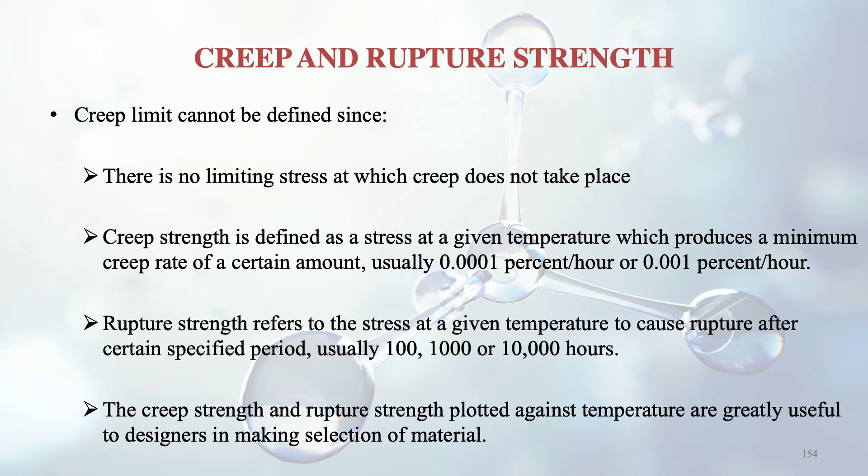The creep strength and rupture strength plotted against temperature are greatly useful to designers in making selection of material. Both these properties are extensively used by designers for selection of material.

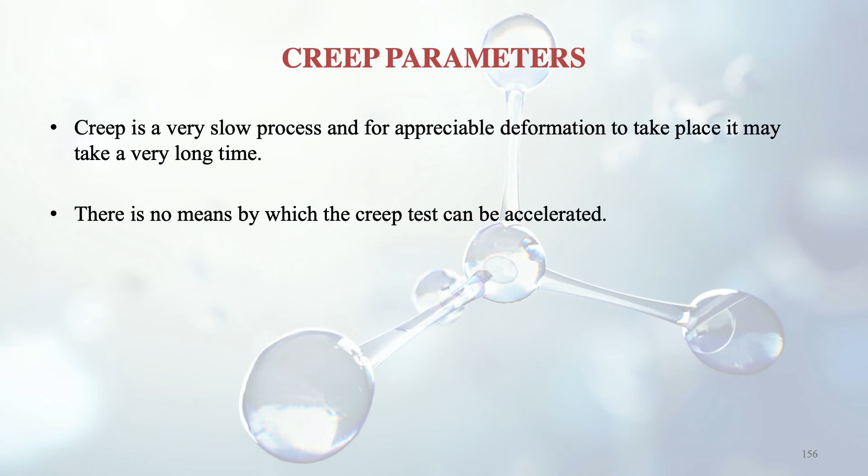There are certain creep parameters. Creep is a very slow process, and for appreciable deformation to take place, it may take a very long time. There is no means by which the creep test can be accelerated; we don't have any means right now.

But technological development cannot wait for assimilation of data on a new material. So suppose we have to use a new material and we don't have the creep properties, then we cannot wait for years. Methods to predict long-term creep behavior using short-term tests are very much required, so we do short-term tests and then extrapolate.

So that is what is being talked about in this method: there are certain methods which depend on extrapolation of data. We do short-term tests and then go for the long-term ones with the help of extrapolation of the data.

So in this session, we came to know about the phenomena of fatigue, its mechanism, and various high temperature resistant materials, why they are required, and the creep phenomena. Because we require high temperature resistant materials, we went into the creep phenomena as well. These were the things discussed, and further we will discuss in the upcoming lectures. Thank you very much.